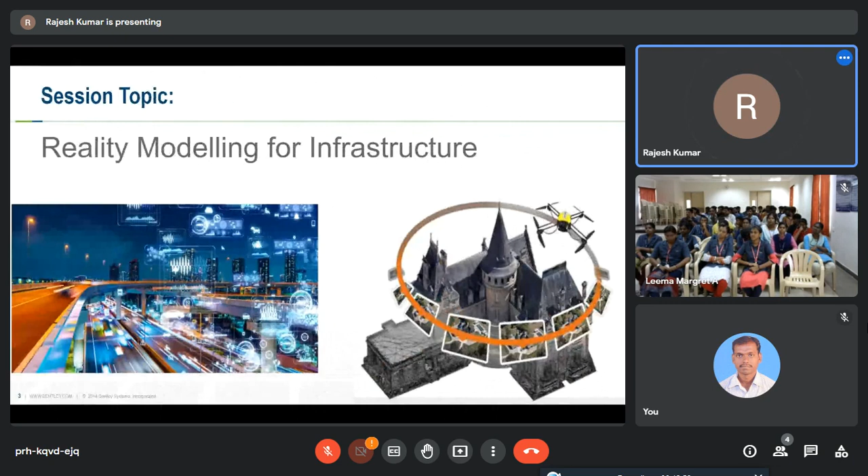So today's session topic is reality modeling for infrastructure. Now let me just brief you on what reality modeling is. Reality is nothing but the real world—the word reality means the real world. And of course you all know what modeling is. So when you do any kind of 3D modeling using your real world images, real world concepts, then it is called reality modeling. So you bring your real world, your reality data, into your infrastructure projects using reality modeling.

Real world, in the sense, is whatever you see through your eyes - the entire earth. If you want to bring engineering data into that reality and do some kind of 3D modeling, that is called reality modeling. You use the real world and your engineering data, your digital data, combine both, and you create a whole new infrastructure, a 3D model.

That concept is called reality modeling. Suppose you have a building in your institute, your main campus, and you want to create a 3D model of it. If you don't have engineering data, it's simple - just take a high resolution camera, or use your tab or smartphone with a high resolution camera, or fly a drone fitted with cameras, and take photographs of the building 360 degrees, as many photographs as possible.

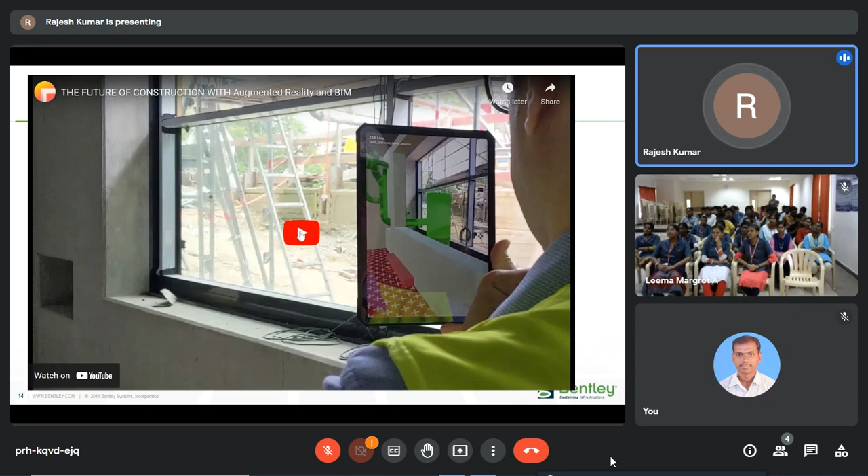How is this AR useful for the infrastructure industry? Very much it is useful. Now I want everyone to see this video of how AR is playing a role in infrastructure projects.

So that's AR applications used for construction projects.

Now, what is MR? MR is nothing but mixed reality. It actually has real world as well as VR. So if you combine both AR and VR, then it is called mixed reality. It's an integration of real and virtual worlds to produce new visualizations. For example, you might have seen a lot of news channels using MR for various visualization processes.

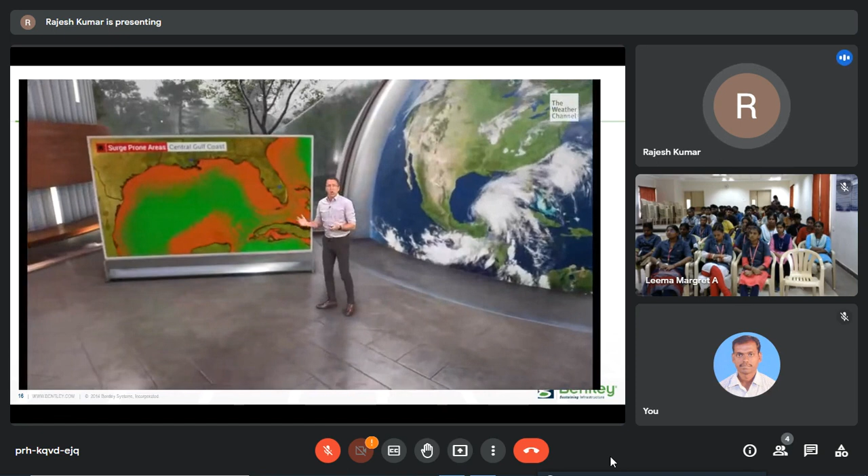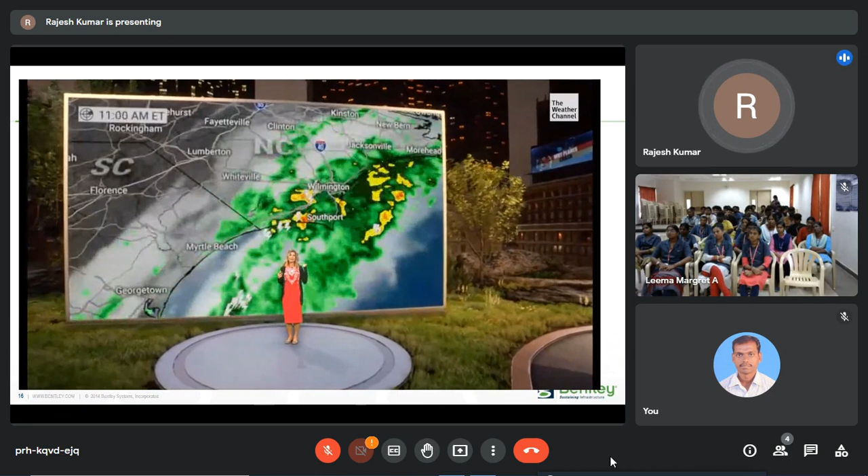The 2020 Atlantic hurricane season is underway. The chance of storms does not end today. We'll be watching severe weather again tomorrow. You could be dealing with a ton of tropical moisture. What wind and water could some of you be experiencing? We've got showers and thunderstorms overnight and into the day Wednesday, with a number of wind and especially water impacts. How about a weather forecast? Out here at the drive-in movie theater, we're going to bring up our big screen. A system this big is not just going to go away.

So that is mixed reality, mixing virtual and real world for better visualization. This is also widely used in construction projects.

So now we have to combine reality modeling, VR, AR and MR, and see how it is practically used in different infrastructure projects.

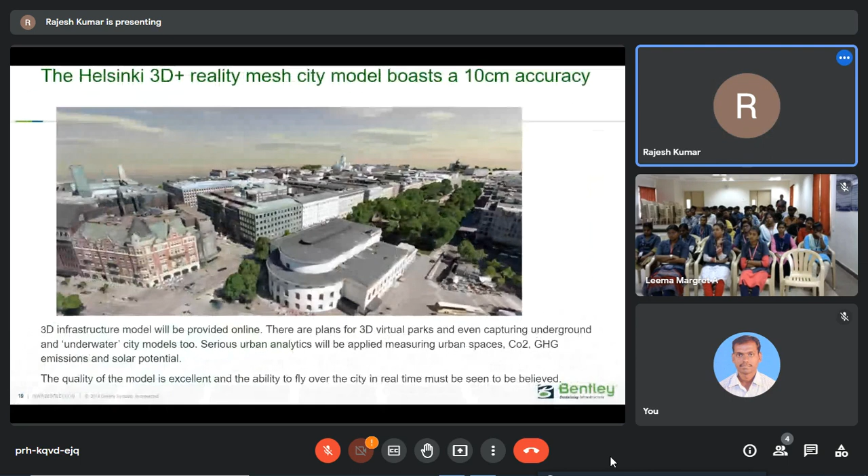Now we have to touch upon BIM, building information modeling. BIM is the next biggest concept in the infrastructure industry. But let's see how this reality modeling we are talking about is very good at site planning.

So this is one of our projects, a winning project. Every year we conduct competitions for companies using Bentley's technologies globally. This is one of the winning projects, actually a construction of a supermarket.

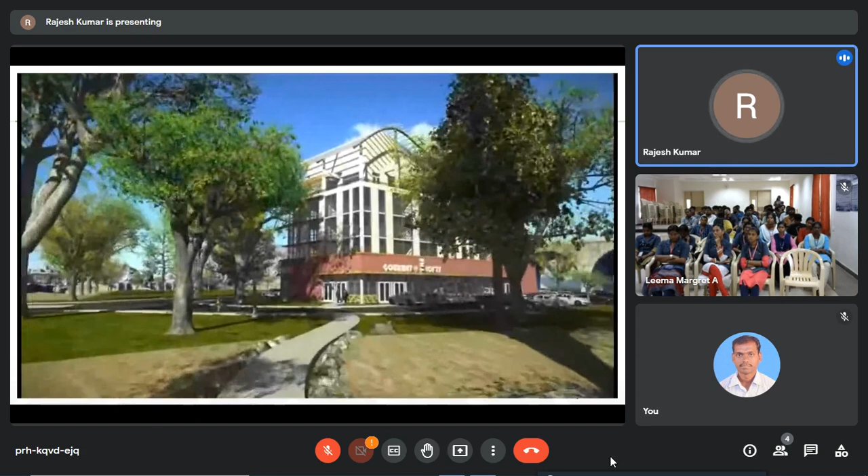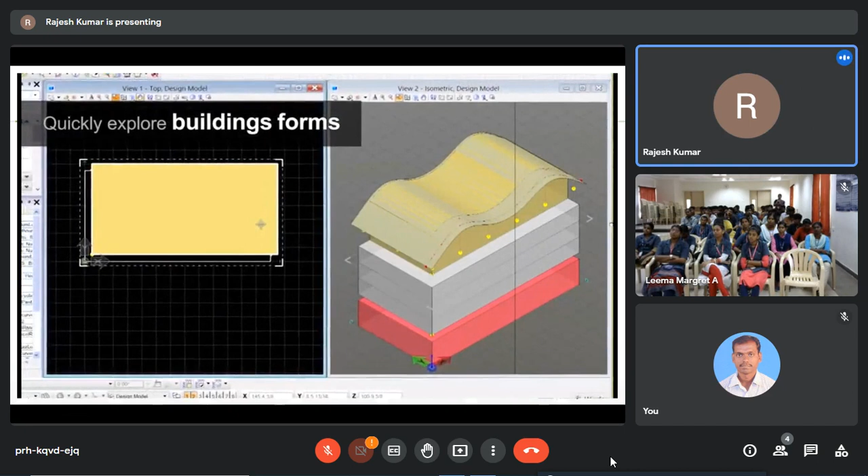So your design starts with understanding the client's business needs. Here they are going to construct a supermarket. Then you calculate space needs, organization demands, and explore building forms. Then you go for site selection and site planning.

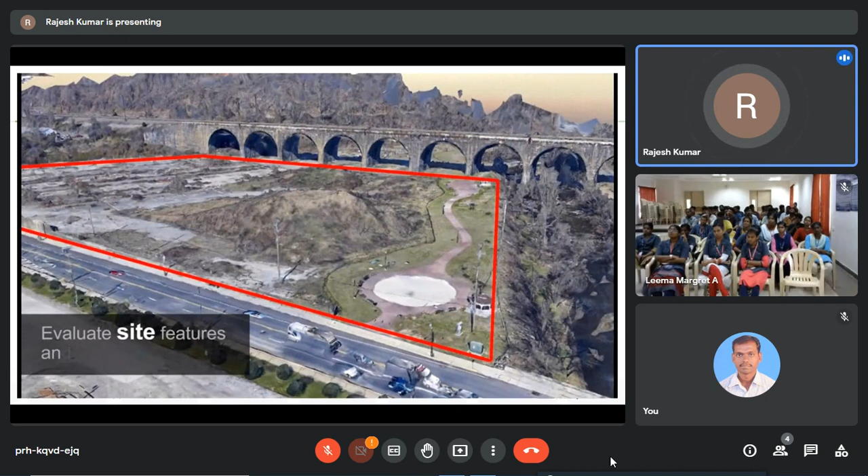Here we are using a reality model from photos of the site. They have chosen this particular site, and a 3D model is created using RM techniques. Then the site optimization.

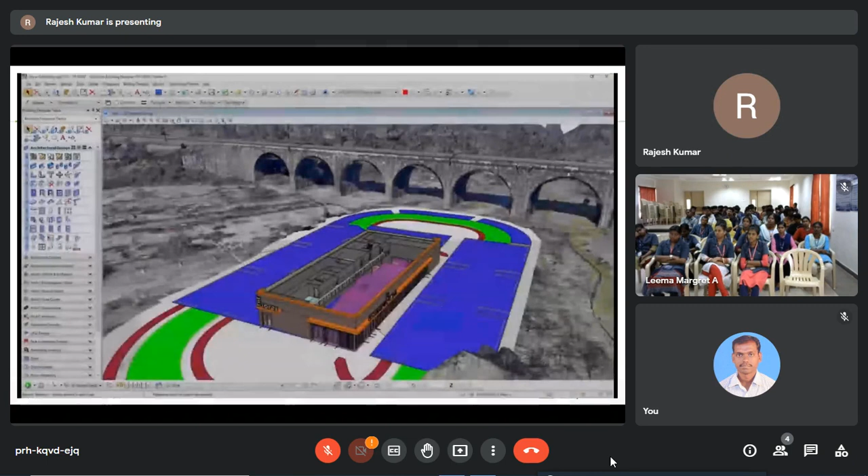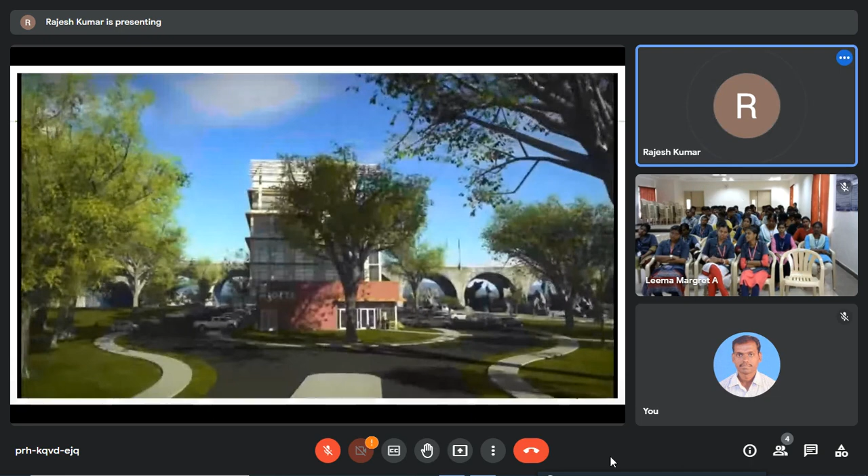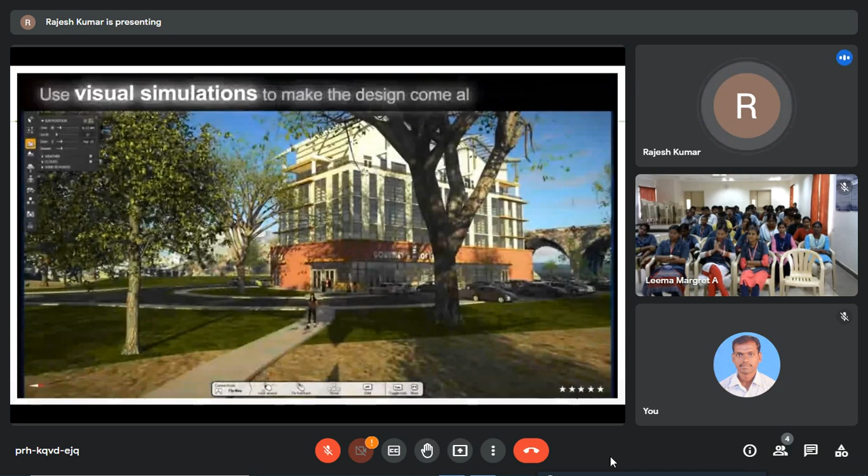So you can create any kind of walkthroughs, you can have stunning visualizations. It's a combination of all Bentley products.

We have used Context Capture for site planning, SiteOps for computational design, BIM software, OpenBuildings Designer for walkthroughs, and LumenRT. For this entire project, they have used 5 different technologies from Bentley.

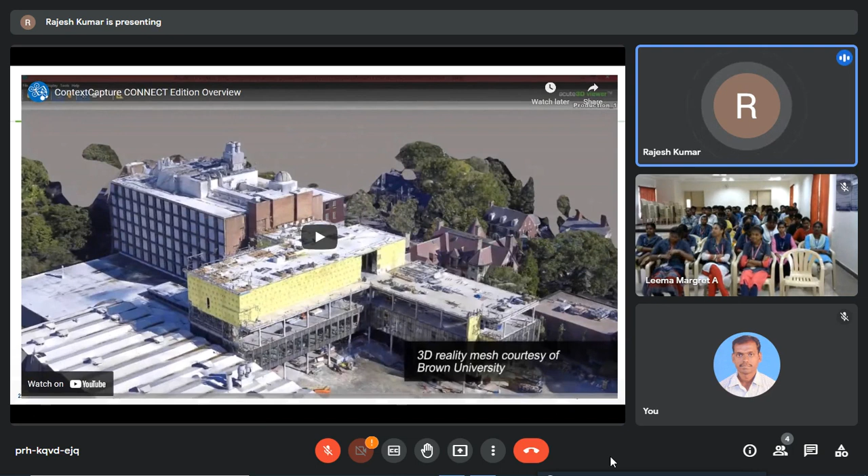Now let's see how a 3D reality mesh of this particular project is created from a simple photograph.

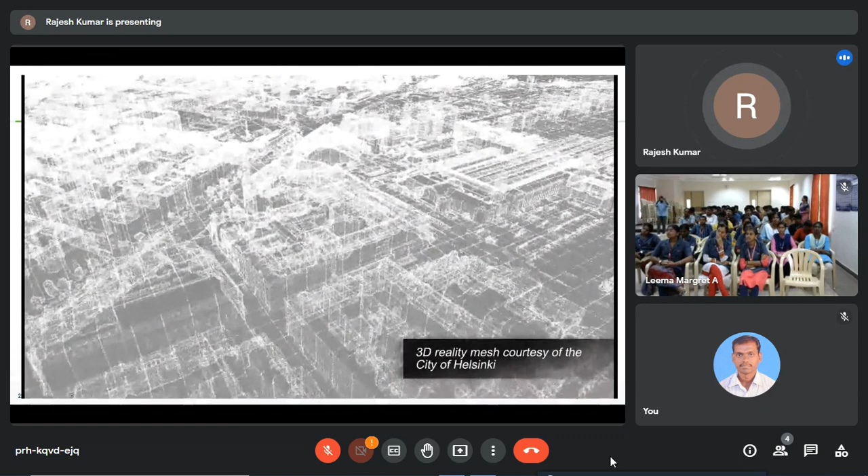ContextCapture is Bentley's reality modeling solution that can quickly produce 3D engineering-ready reality meshes using simple photos and/or point clouds to provide real-world context for all types of infrastructure projects throughout the world. Fully scalable and versatile, Context Capture can be applied to many types of assets at different scales and uses a variety of sensors, from laser scanners to handheld cameras or smartphones.

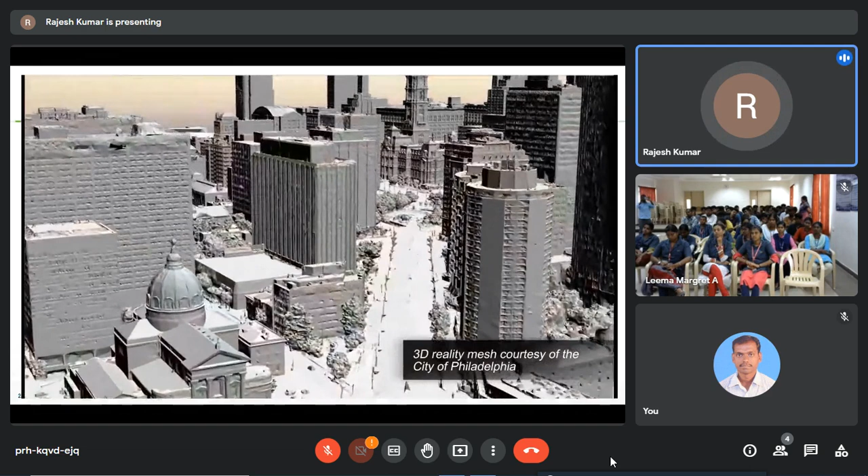To produce precise reality meshes affordably with less investment of time and resources, you can combine aerial and ground-based photos to produce an accurate 3D model of your assets, whether it be an industrial site or an entire city.

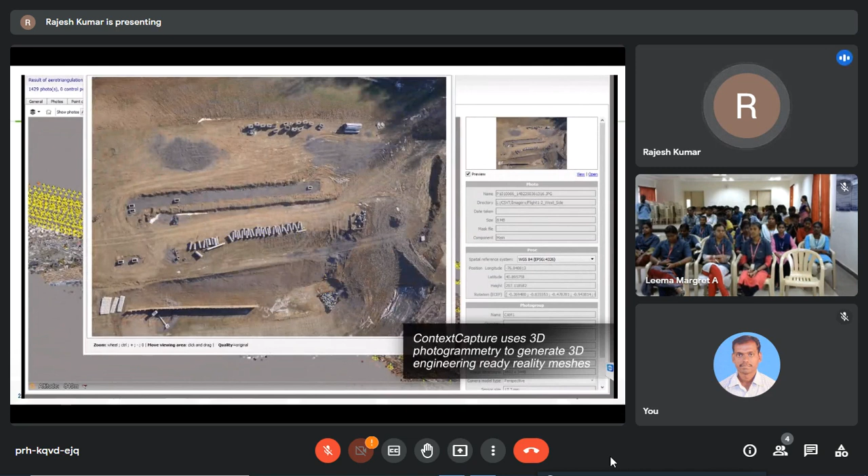Using simple photos, Context Capture employs automatic aero triangulation, 3D reconstruction, texture mapping, and reconstruction constraints to generate highly detailed 3D reality meshes, point clouds, and orthophotos.

Add LiDAR to your photo acquisition when the surfaces lack texture, or the acquisition constraints do not allow for close capture of your target. Leveraging point clouds results in fine details, sharp edges, and geometric accuracy, even when far from your target, such as this substation.

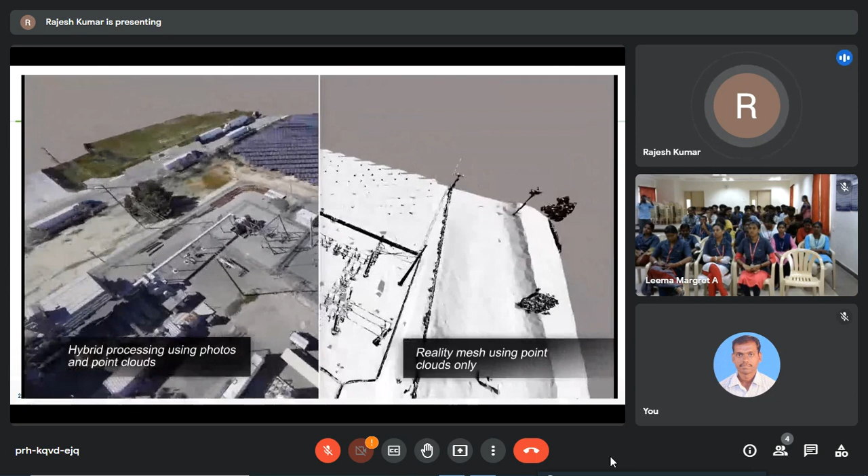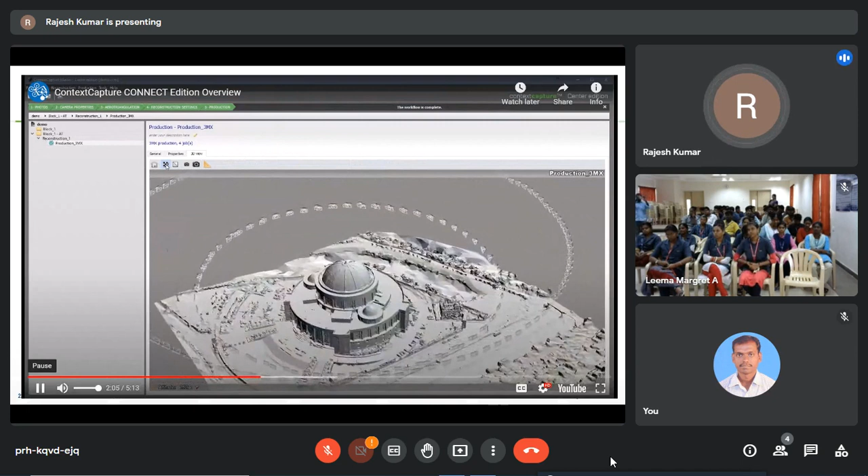Depending on your reality modeling workflow, Context Capture is available as an on-premise or cloud processing service solution. You can produce 3D reality meshes on your local machine or upgrade to ContextCapture Center to save time by employing scalable computing power to speed production of your 3D models, leveraging the latest parallel computing systems.

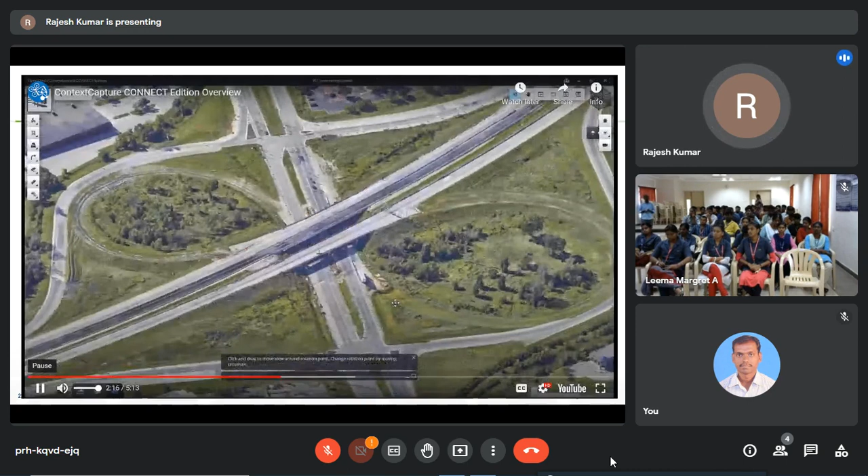Using a desktop or mobile application, take advantage of Context Capture cloud processing to generate 3D models without high-end hardware requirements or IT constraints. Context Capture ensures interoperability, allowing project teams to easily and consistently publish and share reality modeling information, consumable and accessible on desktop and mobile devices in many formats, including native use within MicroStation for any engineering or GIS workflow.

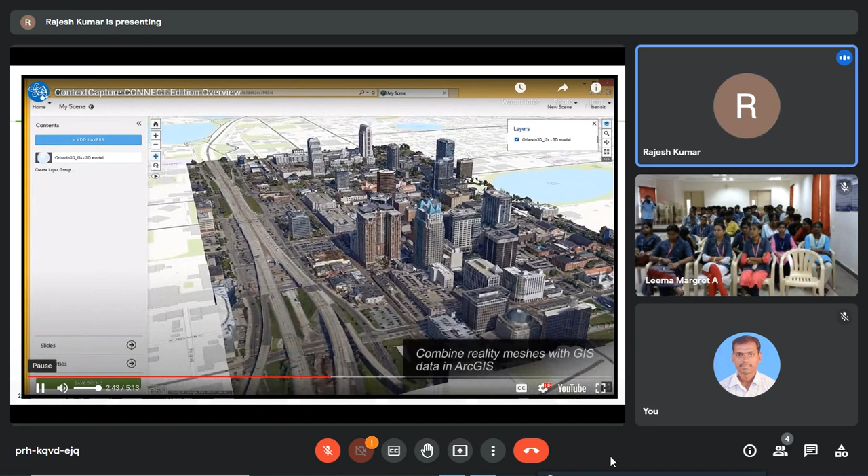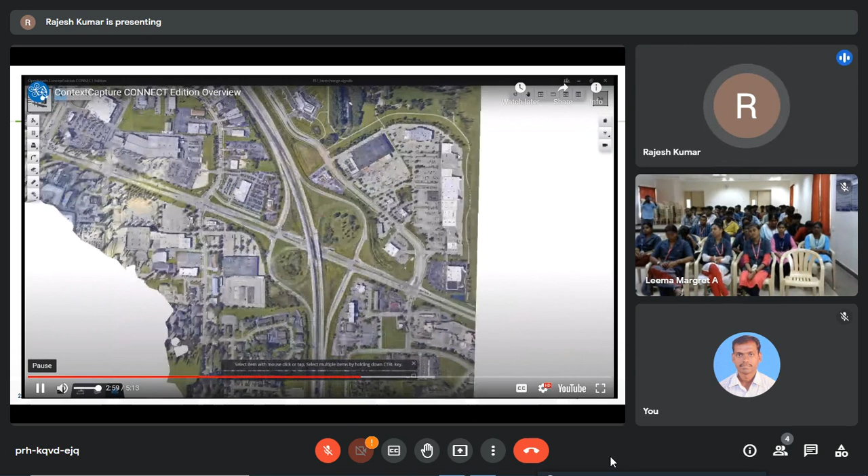Leveraging ProjectWise ContextShare, a connected data environment, you can quickly and securely manage, search, download, and stream reality meshes and their input sources across project teams and applications. With a Navigator web application, you can get high-performance streaming of very large reality meshes through the browser to your desktop or mobile devices.

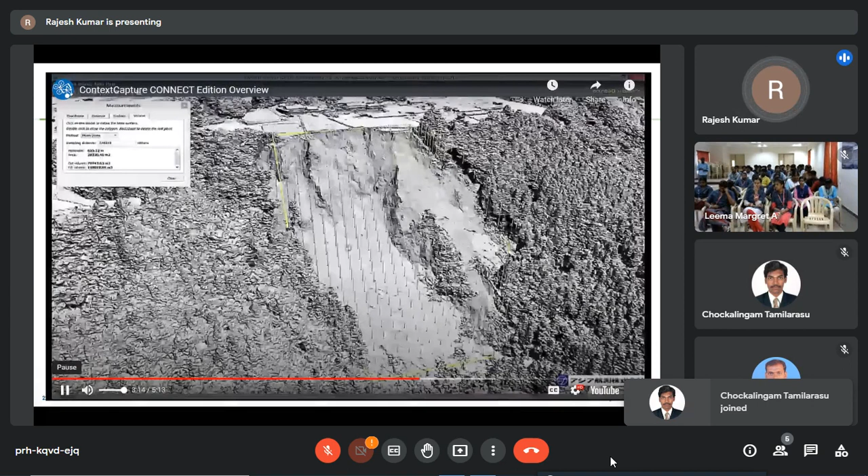With your 3D model, you can accurately measure coordinates, distances, areas, and volumes. Context Capture offers a full reality modeling workflow, from acquisition planning through to consumption of your reality mesh in design, construction, operations, and inspection.

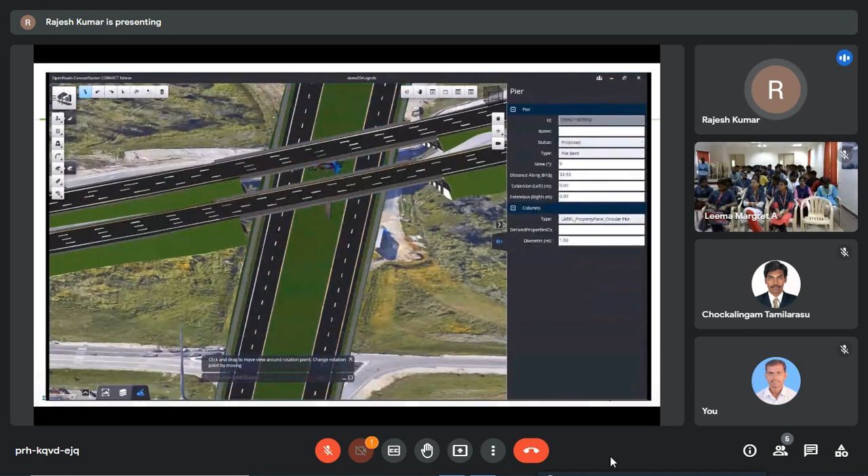In design, reality meshes can be used to better understand existing conditions, to help manage the risk of constructability issues, and identify potential issues earlier.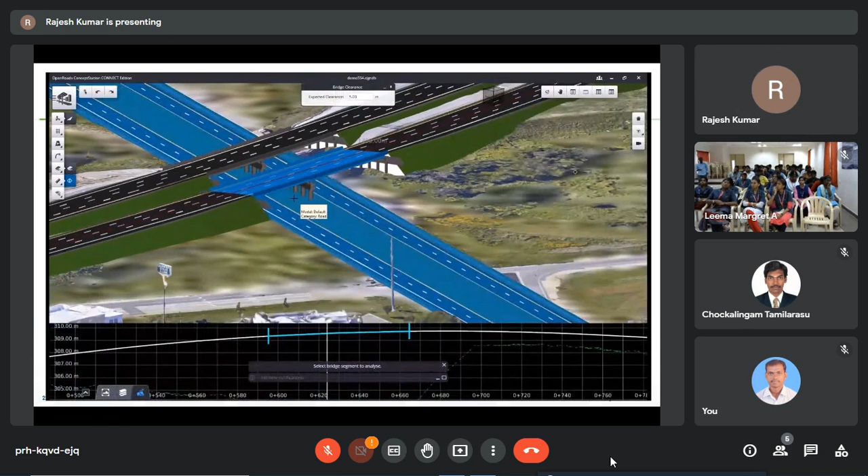In construction, reality meshes can be used for continuous surveying and monitoring of construction sites, for change management and documentation.

In operations, reality meshes can be used to train new staff on existing assets and operating conditions. These same 3D models can be used for virtual operation, allowing owner-operators to easily document existing conditions of industrial sites or factories.

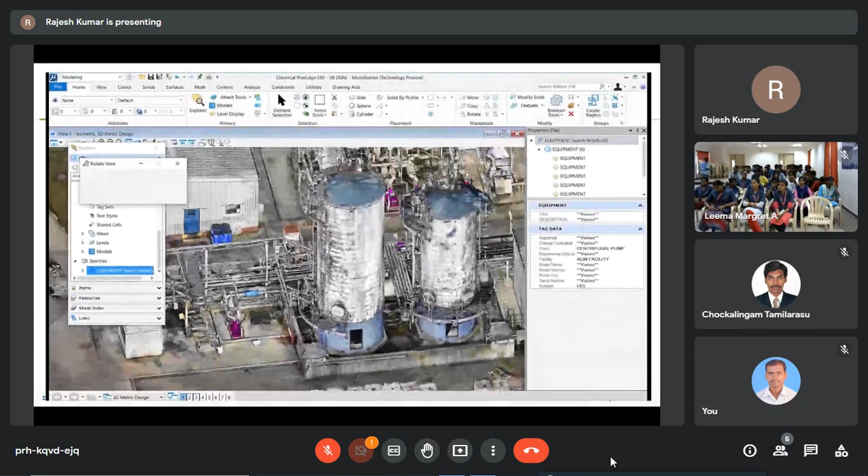The 3D model can be linked to AssetWise or other asset management systems to navigate the reality mesh virtually and to query the database quickly to find a specific asset.

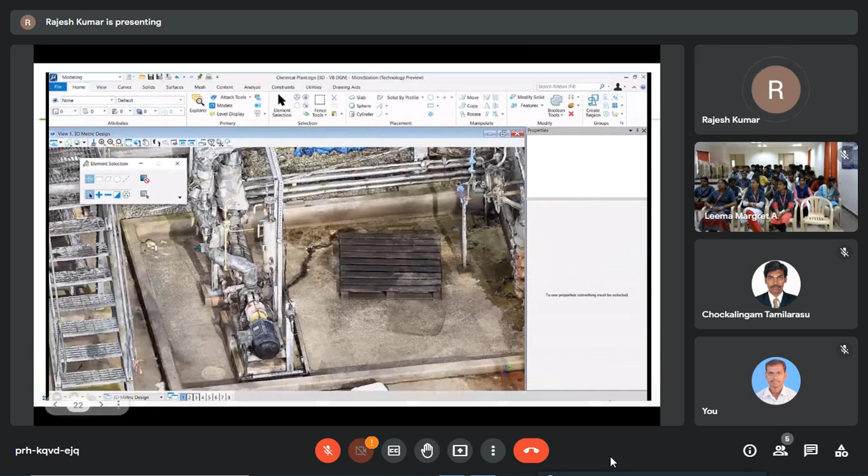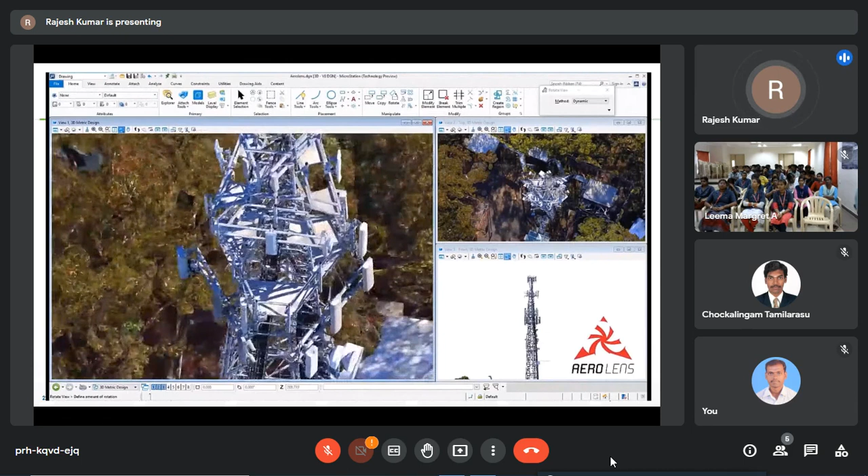Reality meshes can help speed the inspection process and offer higher quality, more repeatable documentation. Additionally, reality modeling techniques allow for easier access to hard-to-inspect locations.

Context Capture is the reality modeling solution for creating and sharing highly detailed 3D engineering-ready reality meshes to provide precise real-world context that can be applied to all phases of an asset lifecycle.

Now let me show you how our Context Capture, the reality modeling software, actually works in step-by-step operations. The first thing is simple, like any software.

We create a new project, we import the photos that we take from high resolution cameras, UAVs, or whatever it is. Second, we perform an aero triangulation, and then if we have point cloud data, we import it.

Here you go to new project, import all your photos. You see I'm just importing all the photos. The photos are loaded with precise positions.

Photos can also be added using the add photos button, and the block can be referenced against the LiDAR data using ground control points. Here you can see the 3D view of the photos I have—these are the areas, the locations from where I have taken photos.

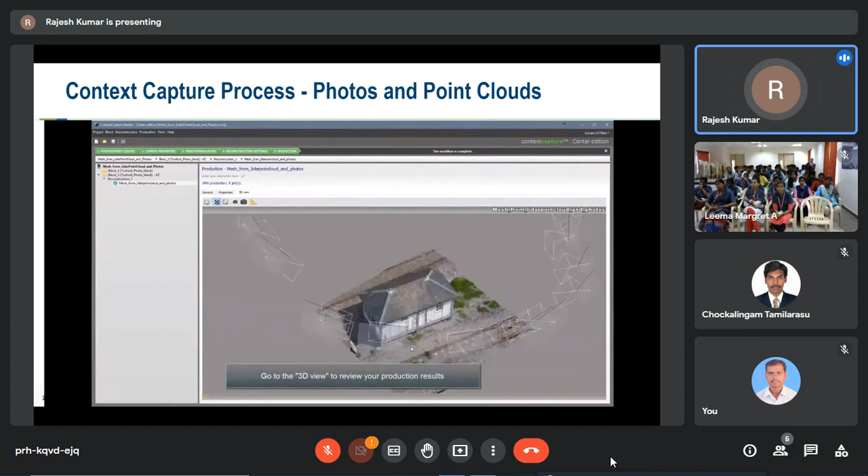Now you again go to 3D view to review your production results. This is how we get the 3D model of a physical asset - this is actually a digital twin of a physical asset. We have not done anything, we have simply taken photographs and a 360 degree, and made a 3D mesh. This output can be used as an input for road projects, reconstruction, construction planning, and decision making.

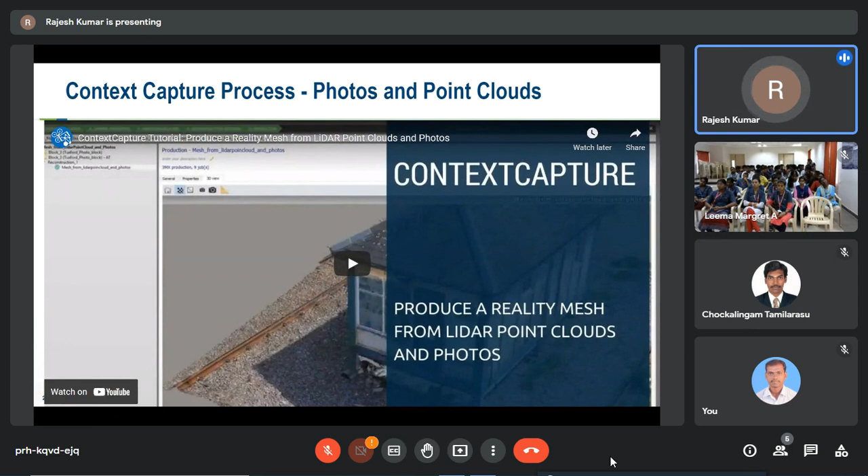Now let me show you how an emergency planning project has been done using reality modeling.

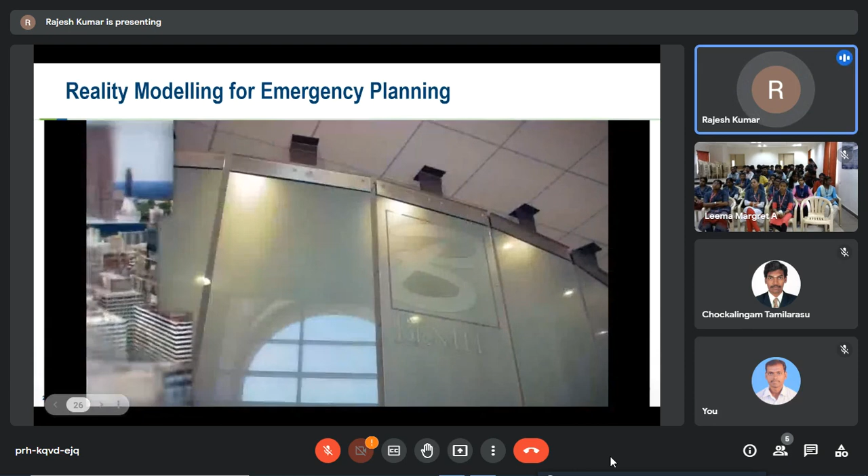The Pope, Francis, is visiting Philadelphia. The department wanted to locate a site and plan - it's called emergency planning - to capture a 3D view of the infrastructure from scratch in such a short time frame. So they wanted to fly and capture photographs. Bentley's Context Capture is an amazing piece of software.

For this particular project, we're capturing about a detailed square mile. Most of the photography we're capturing is going to be from the helicopter, but of course there's only so close we can get to the objects, the buildings, the important structures. So we're also supplementing all this aerial photography with ground-based photography - getting very close to the buildings and reconstructing 3D models from ground level imagery, which will add great fidelity and detail.

Photographs taken and the reality model has been created. This is actually the reality model.

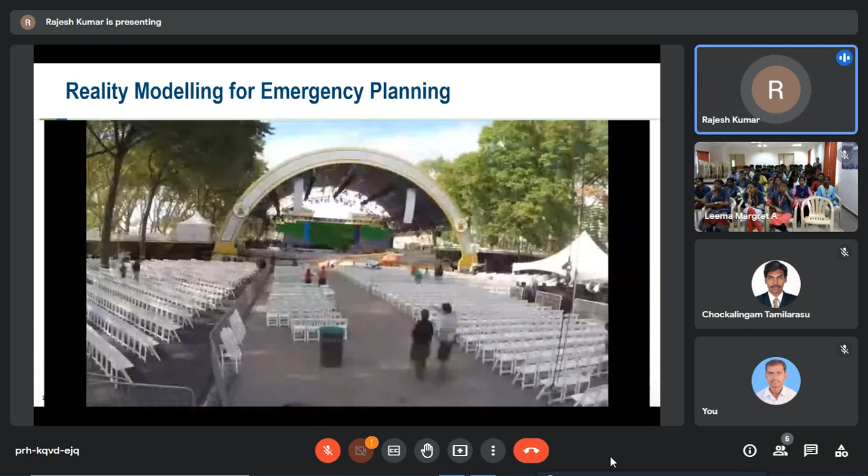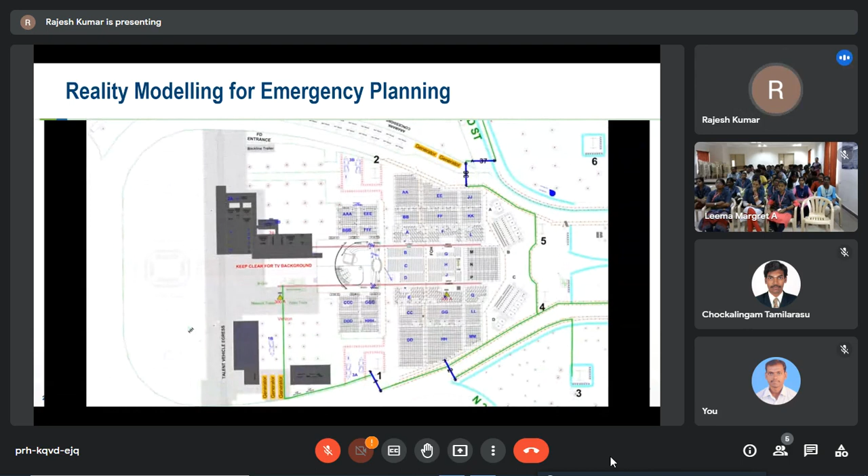When they planned for the World Meeting of Families, 2015 was the first time this event had ever been held in the United States. In fact, it was the whole purpose of the Pope's apostolic journey to the United States. So this is a very large-scale event. What we typically have done in the past is utilize 2D CAD drawings and do lots of site surveys, but the ability to leverage this 3D reality modeling was absolutely a game changer for us.

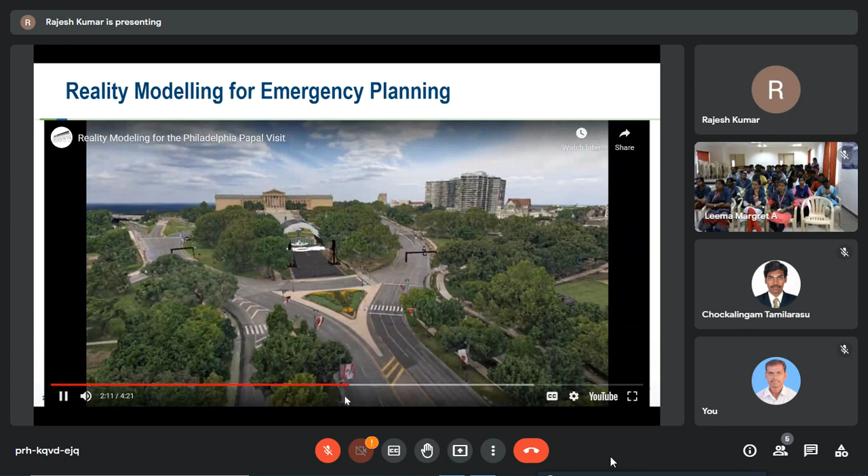A really important thing was it had to integrate seamlessly for facilities directly in the model without having to go through a lot of translations, imports, and exports. We just wanted to work seamlessly with the reality model, and with the integration work that Bentley and his team did, it did work seamlessly.

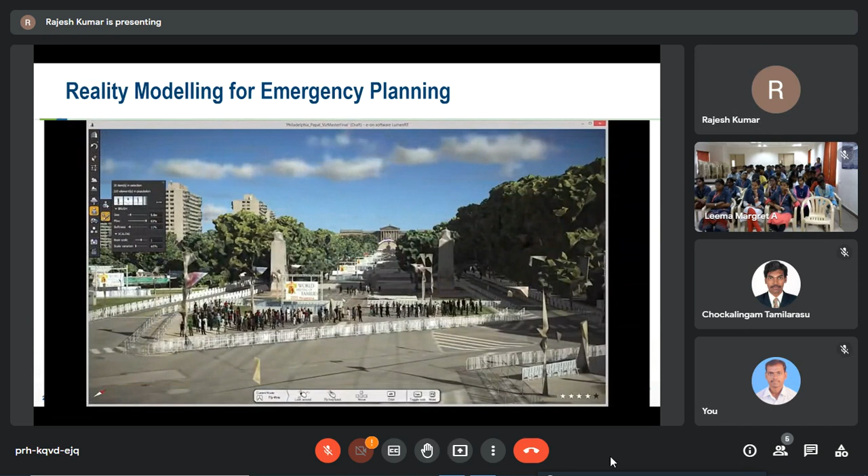The amazing thing to me was when you capture these models, it captures the GPS coordinates, so we know exactly where on Earth the models are located. I could tell you five years ago, if someone told me this was possible to produce a model, I'm still having a hard time believing it works as well as it does.

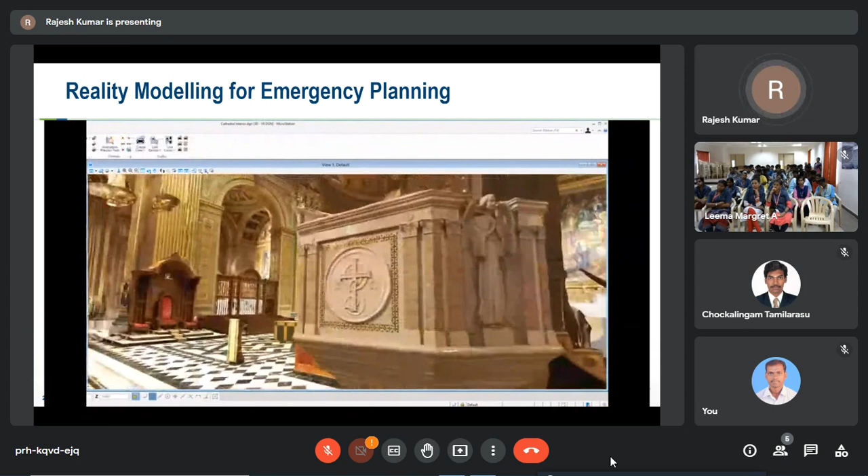Prior to this technology, surveying was something done by specialists once. Now I think where we are, this convergence feels like the Internet of Things, where things are connected together. They can be connected together now in the context of a 3D model captured with reality modeling as it evolves, is constructed, and operated. A special event was a chance to compress that timeline and experiment and learn together about this new potential.

The fact that we test drove it on a 60-acre site gives us all the confidence in the world that the next arena, Opera House, Convention Center, or 60-acre site that we choose to employ this tool will be successful again and again. This will be a tool we use many, many times into the future.

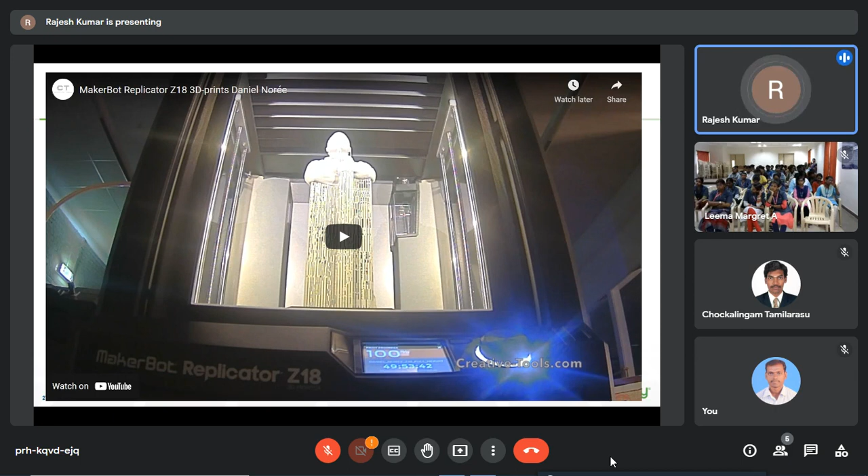Now you just create a 3D model out of simple photographs and point cloud data, and then you can actually create a physical 3D model. Is as simple as that. If you really wanted to create any 3D model of a physical asset, you can create it in a digital twin format using reality modeling software, and then that output you give as an input to your 3D printer, you get an actual 3D physical output. You just check this video.

So we are taking photographs of a person 360 degrees. We want to create a 3D physical model. The input has been given to the 3D printer.

So the reality modeling software is a desktop software. You can install it in your desktop, and you can capture the data, which is nothing but photographs. You can capture it with whatever devices you want. Suppose you also want to do a kind of survey in your construction projects.

You can download something called Context Capture Mobile, which is available in the Google Play Store. Let's see the features of Context Capture Mobile. It's just an application you can use on your smartphone, on any of your Android phones.

You just go create a new project, like for example inspection. And then you go to this place, and you just take a photograph, click add photo, and start capturing photos around your asset, as many photographs as you can take.

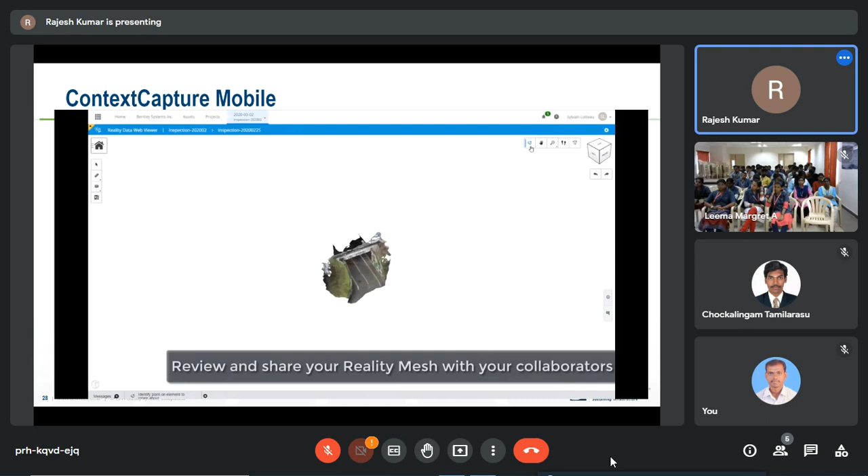So sitting in a different place itself, they can actually review wherever there are damages, and they can plan and estimate what the cost would be. So all these things are done using Context Capture Mobile.

So let me just take you to different applications again. This is for creating large-scale virtual 3D city models. You don't have to be a specialist in surveying and other things.

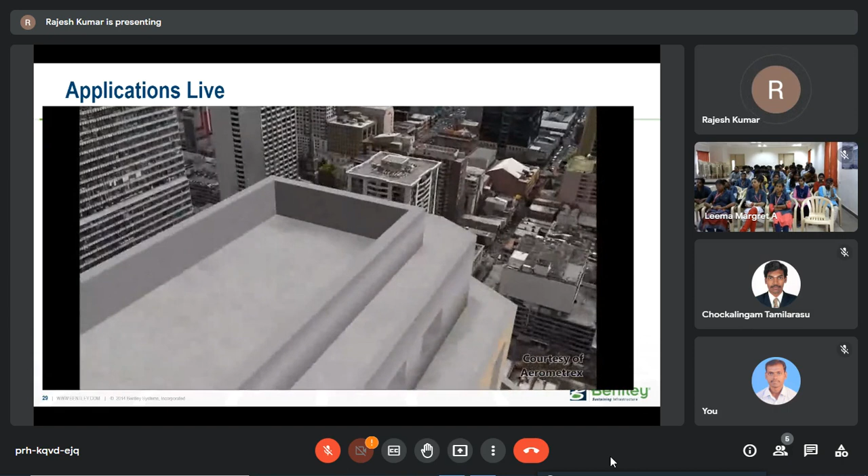Use it for flood management projects, and then different site plannings, new asset constructions, in fact you can calculate solar radiation exposures.

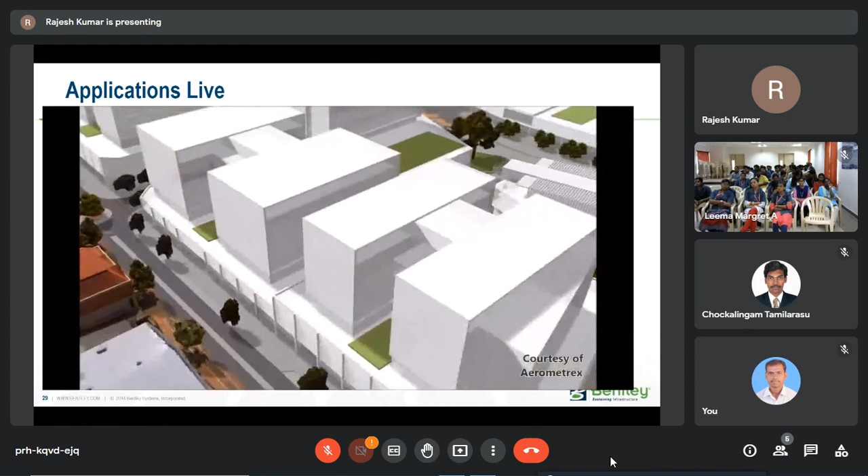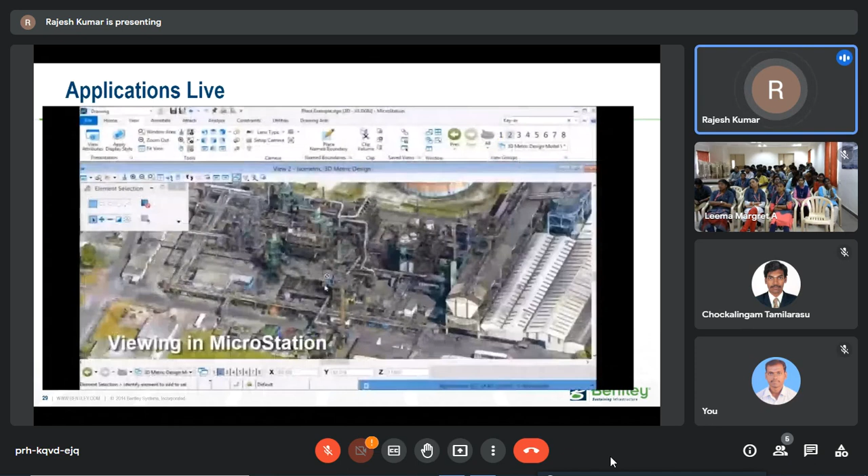This is an abandoned plant where they wanted to decommission it, and they wanted to calculate the bill of materials. You can see this wireframed 3D mesh created, and it can be processed using MicroStation software. So for decommissioning of the plant, again reality modeling is used.

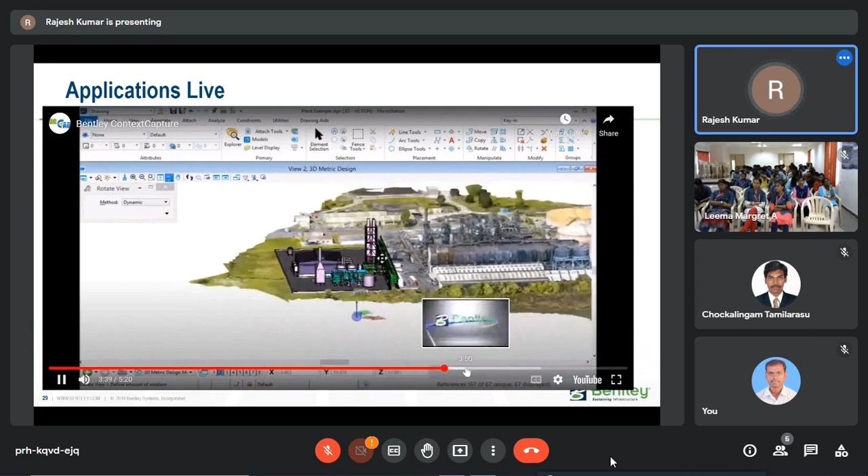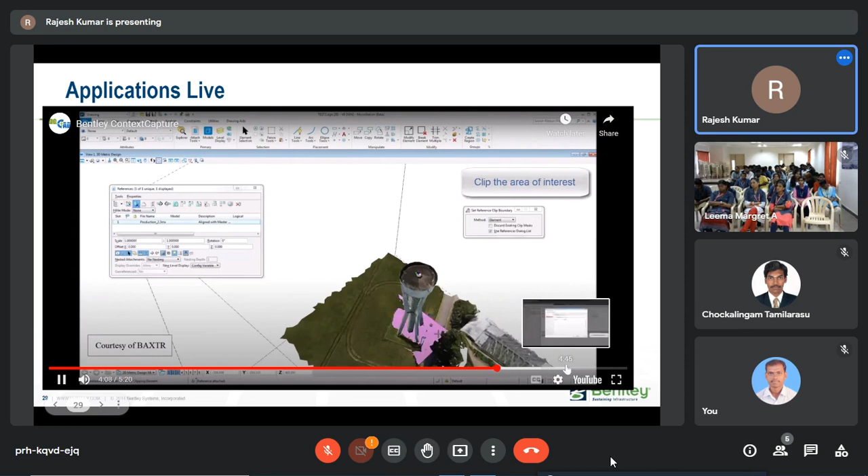Let me just take you fast. So for inspection processes, you can actually create a digitized model. This you have already seen, uploading point clouds.

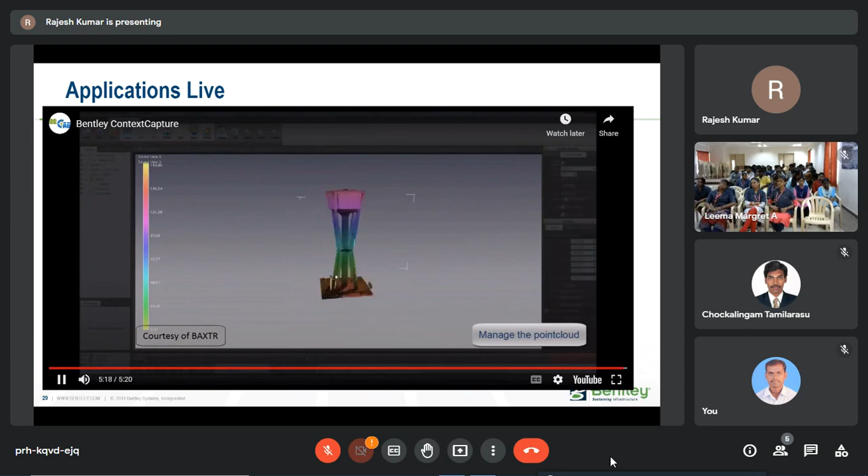So that's it. I think I have given you enough information on all these concepts.